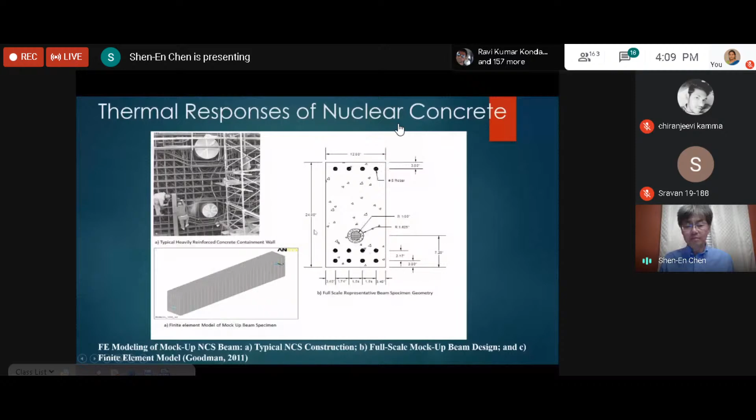To demonstrate the challenge in nuclear concrete material technology, we modeled a beam with heavy reinforcement and pre-stressed tendon. As high temperature propagates through the material, which is what we'd expect from nuclear concrete, we recognize that the temperature measured from the far end of the material is not significant. This is a case of undamaged concrete versus damaged concrete.

When heat propagates through this material, we see there is a challenge in being able to measure the temperature change using existing technology. There are many different non-destructive testing methods we could potentially try, but none of them will be able to see the change in the concrete material.

As seen here, those are existing NDE methods. They are very good for buildings and bridges, but are definitely not sufficient for foundation type or nuclear concrete structures.

So we asked ourselves a question in our lab: is there anything we could do to enhance the sensing of concrete material? We came up with this idea — well, we didn't originate it, but since the early 90s there have been a few groups investigating the possibility of developing self-sensing concrete material. So we looked at the possibilities of making concrete self-sensing.

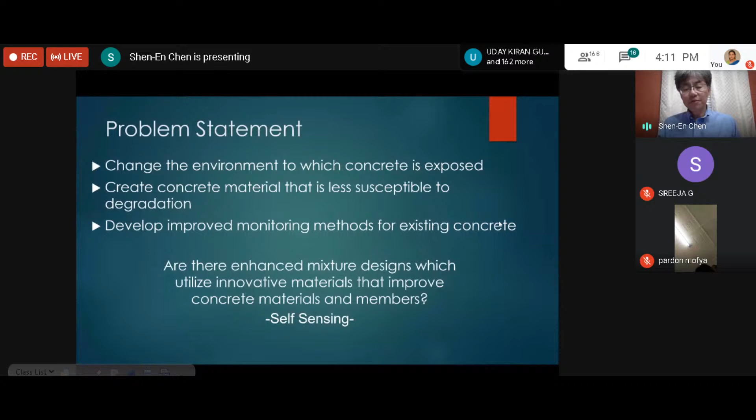One technique would be to use embedded or topical sensors, such as adding fiber optic sensors within the concrete material, or other embedded sensors like piezoresistive fibers and carbon nanotube coatings. But each of these techniques has its own challenges.

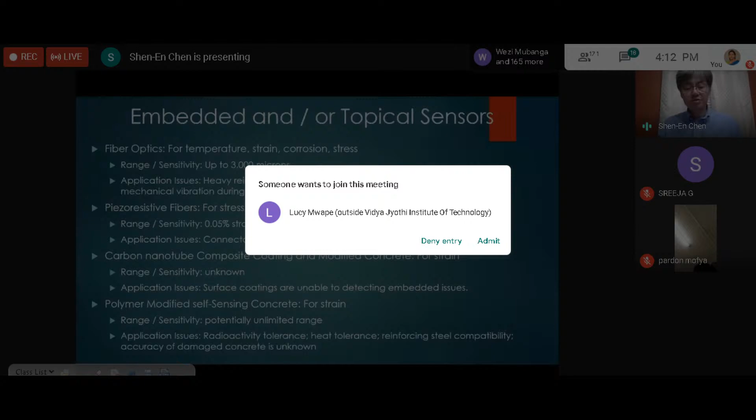The technique we came up with is to enhance the material property of concrete by adding conductive elements — there are many conductive elements we could add. Concrete itself has very poor conductivity. Typical reinforced concrete already has rebars, which have high conductivity, but as I'll point out through the presentation, there are actually many aspects to the electricity concept as we try to develop this technology.

The key is, if we can add certain conductive elements into concrete and make it more electrically conductive, we'll be able to make concrete self-sensing. By self-sensing, we mean adding an electric current to the conductive element, then by measuring the change in resistivity of the material, we can project the change in the condition of the structure. Some of our studies explore whether self-sensing concrete can feel stress or strain.

One of the challenges is to derive the correlation between electric properties and the physical stress strain properties of concrete. This is a very condensed version of our derivation. Ultimately, we wanted to be able to present the strain change in a concrete material as a function of the change in resistivity.

Here's another challenge: we don't really measure resistivity directly. Most of the time, we're measuring the change in voltage, because you have an input current, which is in voltage, and what we're really measuring is the change of the voltage of the material. Another misnomer in this technology is that it's hard to define resistivity for typical concrete structural elements because of the changing geometries. So most of the time, what we're really doing is measuring the change in voltage, which can be translated into resistance of electricity in the material.

Using Ohm's law, here's another important point: in the equation there's voltage, current, and resistivity. The relationship is that when you introduce a current into concrete, you not only change the voltage, but also change the current. So resistance is a function of both the amount of current you introduce into the concrete, as well as the pressure drop, because voltage is really the change in electric current pressure going down your conducting element. There are many things that would impact your concrete's resistivity.

One factor is the volumetric fraction of conductive elements added into the concrete. Another is the presence of ions, because regardless of the age of the concrete, there is always a little pore water within the material, which allows free ions to migrate. Those free ions can impact the electric current and the composition of the pore space. So pore space size and volume is another critical element, and finally, the aggregate location within the material itself is also critical.

From the measurement perspective, we could use direct current or AC, alternating current. The different techniques have significant implications for concrete elements, because a typical concrete element with its massive volume represents more like a capacitor. So if you use direct current projecting into the concrete material, the concrete would actually absorb that electricity. If you look online, there are people studying how to use concrete as an energy storage technique for electricity.

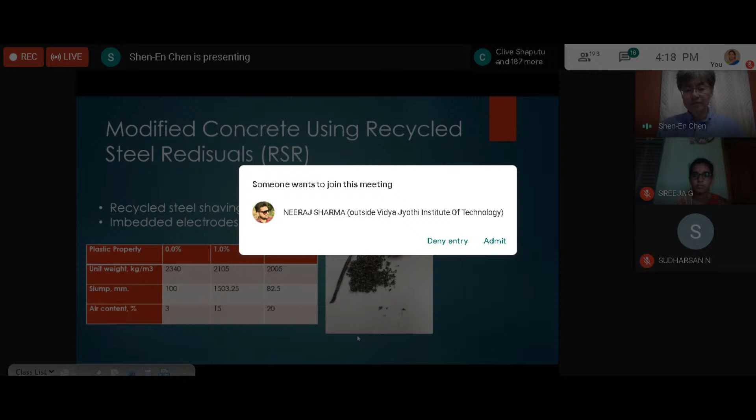The conductive material we choose is actually recycled steel residuals. I apologize for the misspelling there, but this residual material is a waste material from the steel forming process - the stuff that steel fabricators would normally send to steel mills to be remelted into new steel, or just dump in the landfill. So this material becomes extremely low cost and sustainable, because instead of leaving it in the elements, we reuse it, making it very valuable.

But processing this steel material requires both sieving, since it involves different shaving sizes, and dealing with a lot of dust. It needs to be cleaned because it may be greasy, and processed in order to use it back into concrete. In our laboratory, we try different proportions of this material added into concrete. I won't go too much into the proportioning, because the idea here is just to introduce the technology.

Another design consideration for this self-sensing concrete is how you embed the sensing element into the material. This is what we've built for the standard concrete specimen, where we put copper wires leaving about 25 millimeters of opening, so that when electric current is introduced through any of these conductors, the rest become sensing elements. In this case, we could introduce the current from the top wire or the bottom wire, and all the wires within would be the sensing elements.

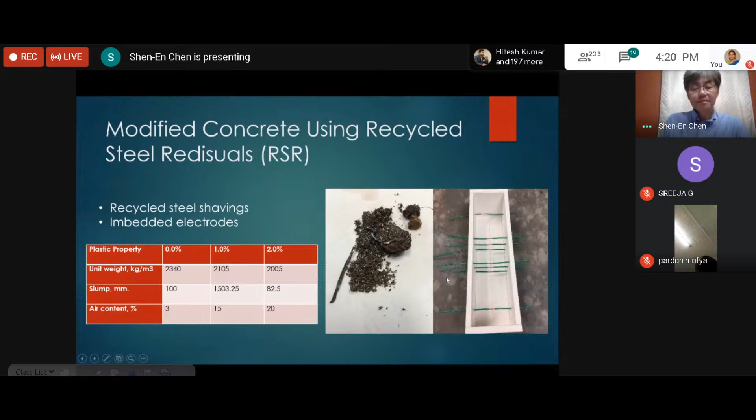Because of the steel fiber, your end product is actually stronger than typical concrete. But because of the added complexity, it's really hard to imagine the path of the electric current going through the material. So one of the challenges in this study is that we haven't been able to establish the theoretical model of what's happening within the system.

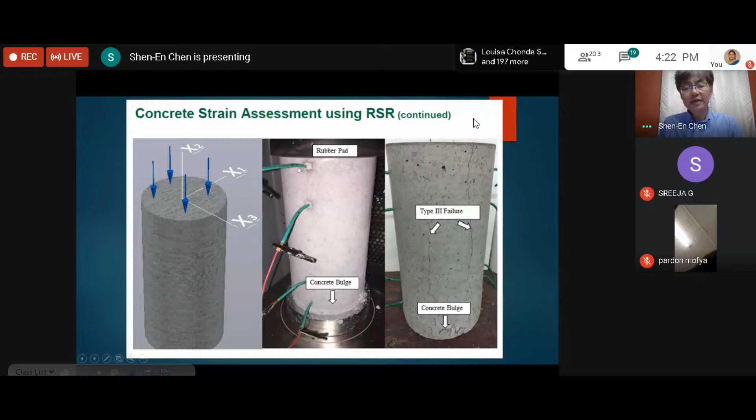So the correlations that we have developed are all based on experimental correlations. We first start testing on standard concrete cylinders. In order to measure the self-sensing component, we have to drill holes and then embed those copper wires to do the self-sensing, and then do the standard compression test on those specimens.

As you can see, the resistance change is actually consistent with the compression load, with some variation. And this variation is all material property dependent.

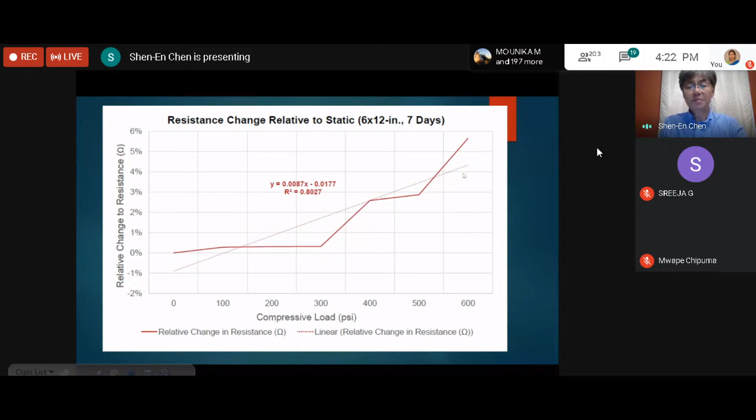This was the 7-day concrete. And then for the 28-day concrete, we were actually able to distinguish 3 different phases of the transition. And then we make a correlation.

So you can imagine during the small strain loading, because of the loading setting, you are expecting to have a larger deviation of your measurements. But then as you load to a higher strain rate, higher strain level, you will get a more consistent measurement. So this gives us a lot of confidence in the self-sensing capability of this concrete material.

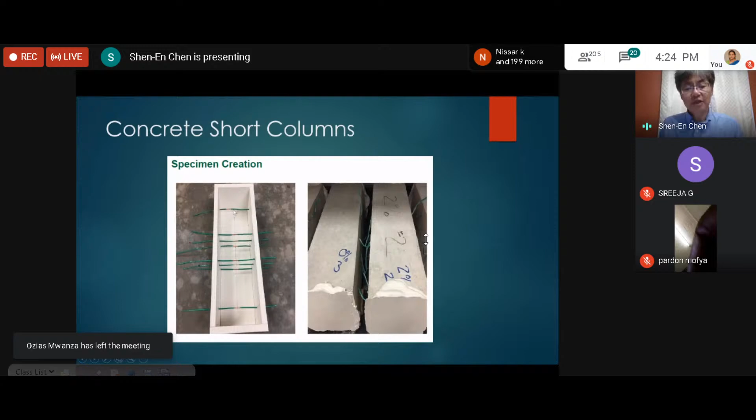And then we start developing concrete short columns. This is, again, the standard setup of using those conducting elements, the sensing wires. So the self-sensing component consists of 2 parts: one is the fibers that we add into the materials, and the second is the sensor itself, which are those copper wires built into the material.

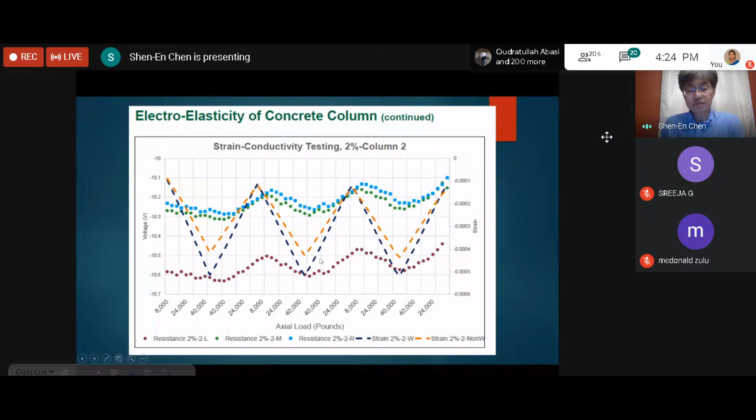And this is the outcomes from a 2% column. We do cyclic loading so that we can ensure that our readings are consistent and repeatable.

So you can see that we load this beam in a cyclic manner for 3 cycles - loading, unloading, and then loading, unloading again. And so for the 3 cycles, you can see the change in strain, which is read by the attached strain gauge, and then by the resistance or the voltage measurements.

And to make a practical application, you have to use the readings that you developed through the technology. And what you were able to accomplish is that you see there is an assumed linear correlation, so that by matching the linear correlation with the theoretical equation that we have derived.

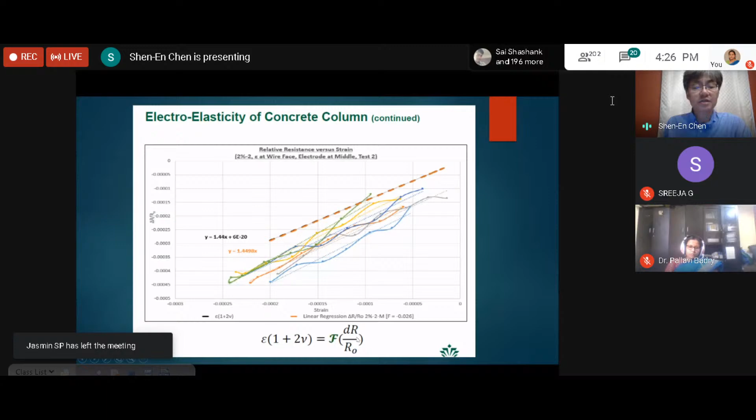So here there is an empirical factor F that you have to embed into the measurements, so that you're able to correlate the change in resistance to the change in strain.

And then at that juncture, we know that the self-sensing is a very useful technique, and we are actually developing good correlations between stress strain and also the voltage change in a self-sensing concrete. And then we have another student who got interested in studying the thermal cycles of the concrete material.

And so we do what we call the cool down test. We first take the specimen and then put it in the oven and heat it up to 100 degrees Celsius. And then we allow it to cool down.

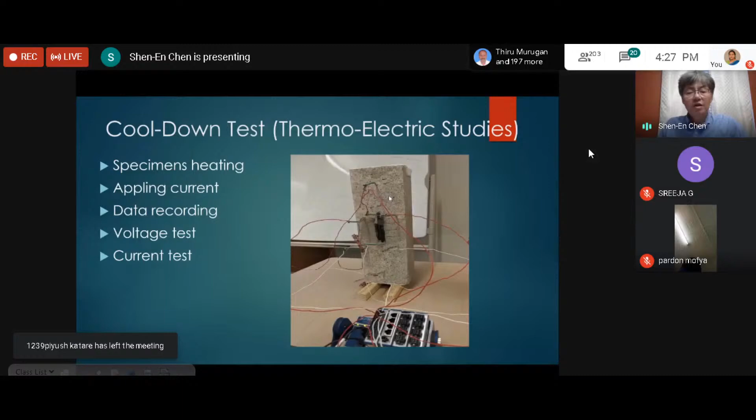We're trying to correlate the thermal properties, which is the temperature change versus the resistance change in the concrete material. Again, the same technique: we use applied currents through the material and measure the change in voltage. At this juncture, we also realize that there is another component to it, which is the current also changing through the material. So in this particular test, we did both the voltage and current measurement change.

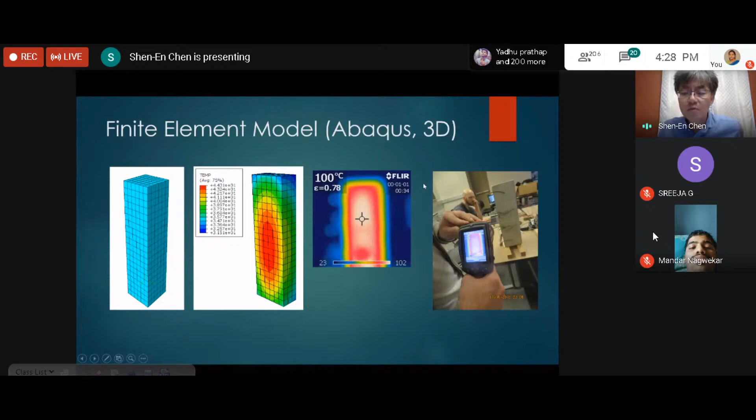The general idea is that the surface of the material is cooling at room temperature, so you have a hot core and a cooling surface surrounding the hot core material. This red spot here is where we have the strain gauge and epoxy, so that has a different cooling effect on the element. This helps us understand that what we're measuring is accurate.

So it becomes apparent to us that the technique needs to have both current and voltage measurements in order to accurately quantify the change in resistance. But that makes the technique a little too complicated. So again, we're trying to develop a correlation between temperature change and the voltage measurements, and we were able to use both Joule's law and the temperature change to develop a correlation between the two.

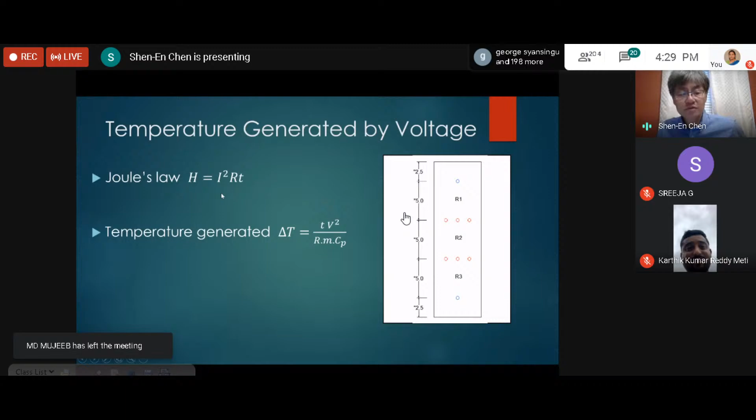One application of thermal concrete is the new idea of using concrete as an energy storage technique. There are two applications. One is to apply this as a fossil or any kind of mass energy production plant.

During fossil energy production, we use a lot of water because the water would be heated up to steam, and the steam pushes the turbine so that we can generate electricity. But usually at a fossil plant, we release the steam into the atmosphere. So with this concrete energy storage concept, you can actually circulate the steam through those concrete pipes.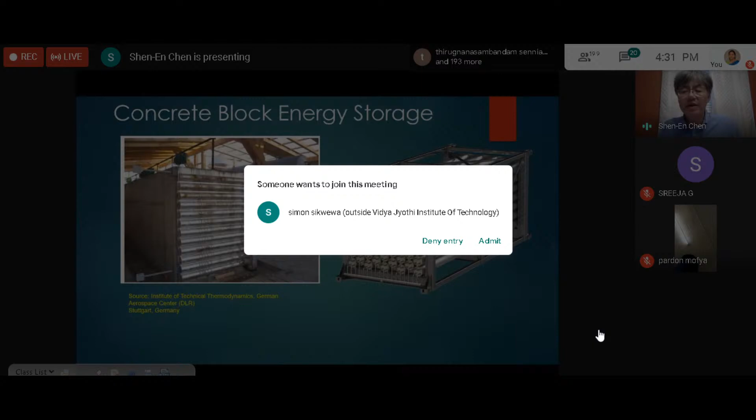In our laboratory, we're also trying to develop such a technology, but at the same time we try to introduce self-sensing into these elements. The reason we do that is, as you can imagine, going back to this slide, if any of these elements are fractured or damaged, because they are so massive, you will not be able to detect the change within the storage system. If we can make this element self-sensing, then we will be able to pinpoint which cylinder was damaged, and then we can replace that particular cylinder.

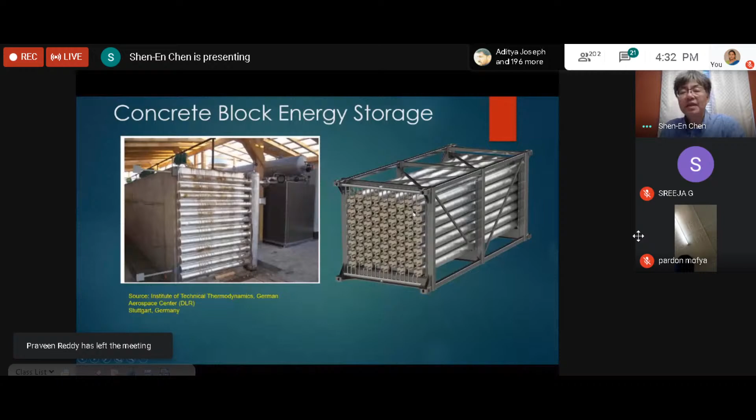So it becomes a very effective technique and reduces a lot of labor and cost for the concrete storage technique. So there is advantage to doing such a technology. To develop such an element, we use thermal quantification of how much energy is stored into those cylinders, and then we embed, using the fiber reinforced concrete, as well as embed electrodes into these elements.

Okay, so this is our energy storage concrete design. You have a heat drum where you circulate heated water through the system, and the water pipes introduce the hot water through those elements. We have two different versions: one with four pipe cylinders, and the other with a single pipe cylinder system.

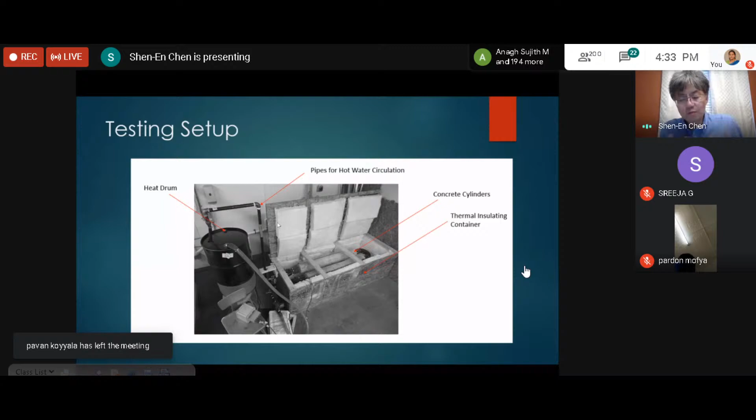This is ongoing research, so I wanted to point out some of the challenges we encountered doing this research.

This is our single pipe concrete element. You can see we have embedded a lot of thermocouples, which are not visible because they are K-type thermocouples. Those green wires are our copper wires for the voltage change measurements. The red coils are the thermocouple measurements. And this is the experimental setup.

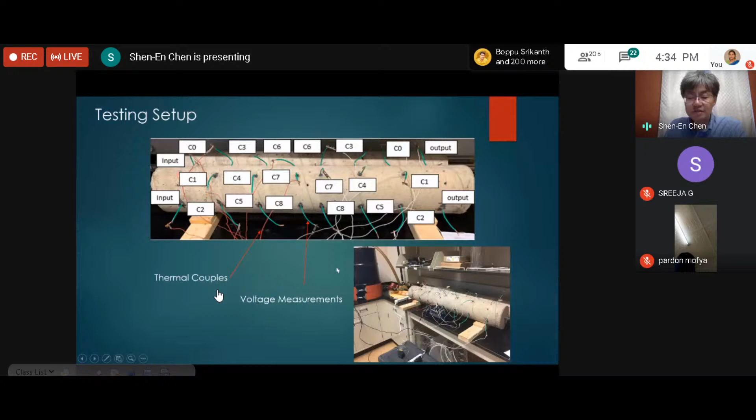We have the heat drum that heats up water that circulates through this pipe, and that would increase the temperature. We use finite element simulations to show, and also use infrared to show exactly what's happening with these concrete elements.

We were able to heat the elements up to 100 degrees Celsius, and during the heating and cooling process, we do the correlation between the voltage change. Here is the temperature change versus finite elements that we did on those concrete cylinders we made for the energy storage. These results are within room temperature, so there is no insulation element to this particular experiment.

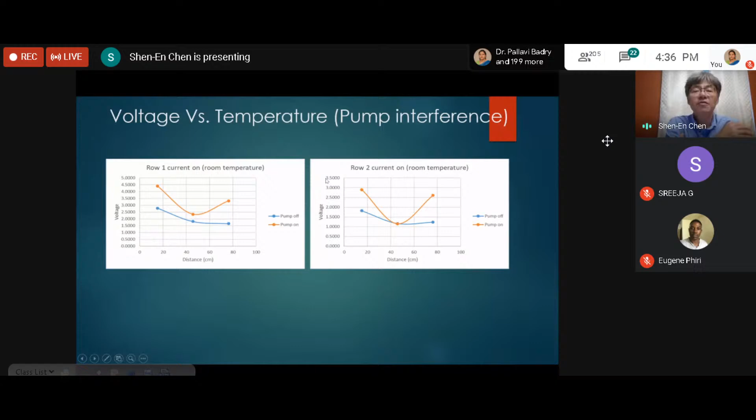Okay, and this is another thing we found. When the heat pump was on and off, the electric interference, the EMF interference, to our experiment is visible in our measurements. So that's one of the limitations of this technique - because you're measuring the voltage change, any large power systems surrounding your measurement technique need to be avoided, because they would interfere with your voltage measurement.

This can be avoided by shielding, but we currently are still learning how to shield those kinds of EMF effects. And this is the voltage change measured at different locations along the cylinder.

Another important thing to point out here is, as you can see, the results can have big variations. So the length of your measurement, the distance effect, is critical. We recognize that if you have a longer measurement range, you actually get better results, as shown here - 76.2 centimeters gives us the best correlation. Row 1, Row 2, Row 3 are just different positions along the cylinder.

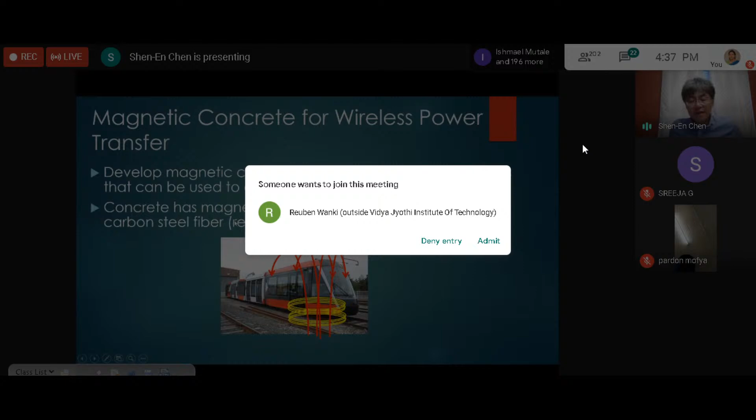Next, I wanted to discuss the magnetic concrete component. The inspiration for this is actually in wireless power transfer. In our laboratory, we also do a lot of railroad propulsion technology development, because our interest is still in the civil aspects of this. This is research work that we collaborate on with both the electrical and mechanical departments.

The challenge here is there is ongoing research on how to wirelessly charge electric vehicles. So instead of a train, imagine a car powered by lithium-ion batteries that need to be charged. Right now, with direct wired charging, there's a limit on how fast you can charge those cars. If we could have a lot of wireless pads underneath a car, you could potentially charge cars while the car is still moving. That is the inspiration behind this particular research.

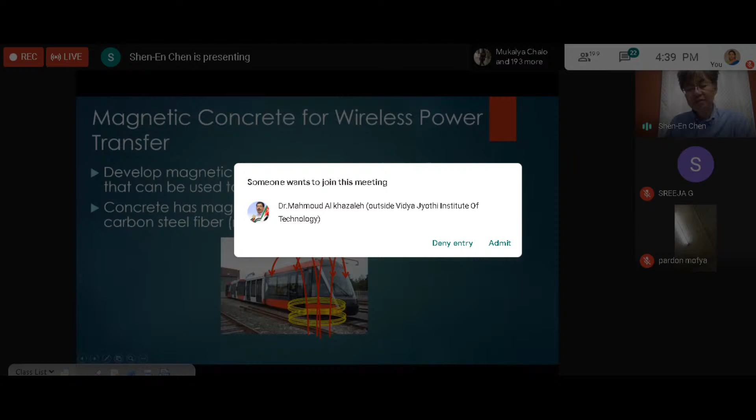So the question is, how do we design that? In our laboratory, because we focus on railroad technology, we wanted to develop similar charging technology for electric locomotives. Concrete has very poor magnetic permeability, so in order to make concrete materials magnetic, we have to modify the concrete material. Luckily, the carbon steel fibers we have used for our electric current research have a relatively high permeability, about 1,000. Not the highest materials, but again, there is a trade-off between cost and material property here.

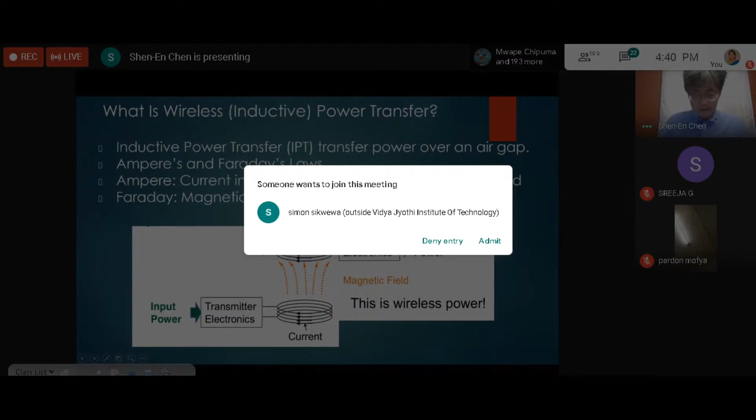Okay, so just to refresh your high school magnetism and introduce what is inductive power transfer. There are many methods to do wireless power transfer, but the most accepted technique, because we are interested in high speed and also high power transfer, is inductive power transfer.

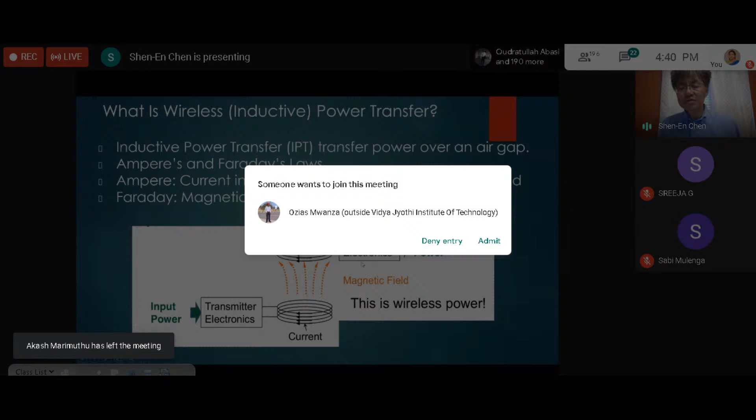Inductive power transfer requires two coil systems. One is the receiver coil that will generate electricity into your locomotive, and then the transmitter coil, which is where you use current to generate an electromagnetic field. This electromagnetic field results in an induced magnetic field on the receiver end, and then using power electronics you can convert that into electricity. So this is the general idea of wireless power transfer using induction.

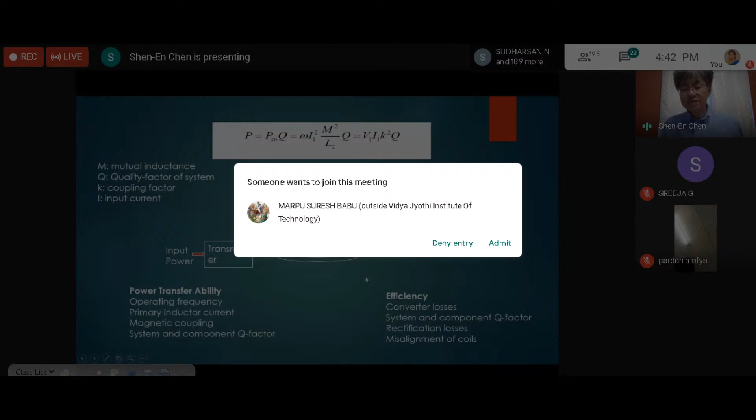This is a really neat idea because it combines both Ampere and Faraday's principles into the technology itself. A critical challenge in the design is that when you introduce current into your system, you need to make it into a single or multiple bandwidth magnetic field. In other words, we get into the argument of DC current or AC current, and in order to make this efficient, you have to take DC current and convert it into a single frequency or a bandwidth of frequencies to optimize the transfer of the magnetic field in your system.

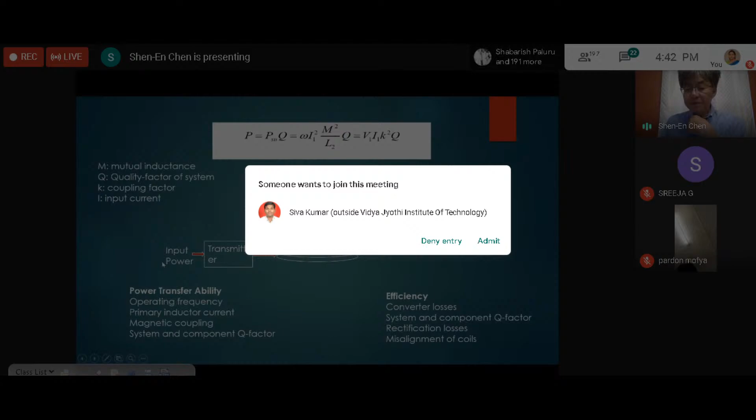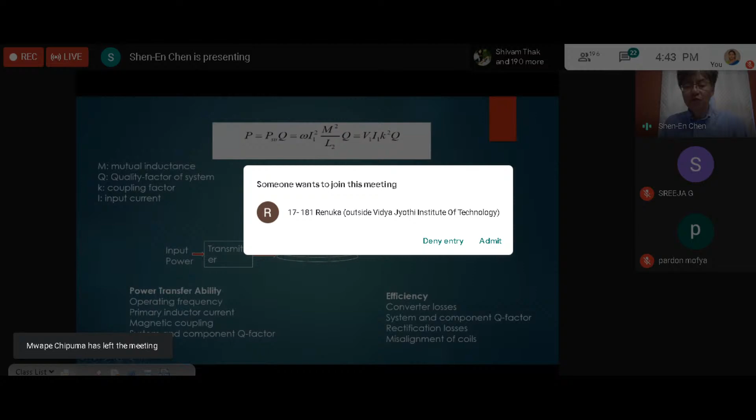There are a lot of theories out there that talk about the advantage of an optimal frequency, and one of the things you want to do is avoid the resonant frequency of the system. For any coil system, because of the size of the coil and the number of turns, you have an optimal frequency that is close to, but avoids, the resonant frequency of the system. So being able to select the design of your coils and determine the optimal frequency for the magnetic field power passing is a critical part of the research.

And here is where the practical application demonstrates. We imagine having a pickup coil, which is the receiver coil, embedded underneath the vehicle, and then the other wire coil will be embedded in the pavement.

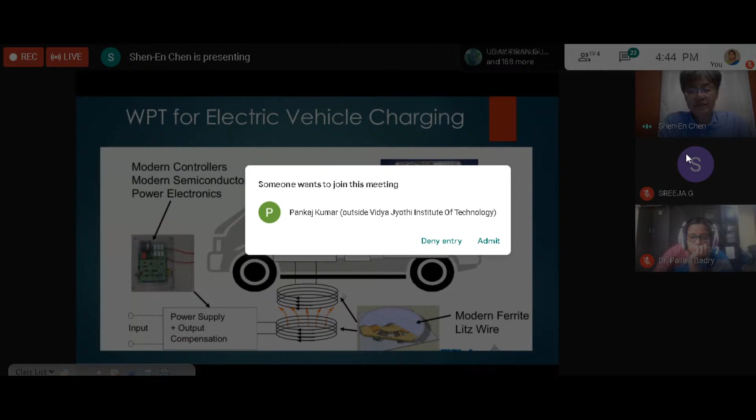So there is a receiver coil that is embedded into the pavement for the vehicle. A typical coil wire is what we use, the ferrite Litz wire. Ferrite is the most conductive element and practically cost effective. Ferrite has a magnetic permeability between 3,000 to 5,000 range.

This is not work done by ourselves, but just to demonstrate the application, this is by Nissan. This is a Nissan vehicle, and you can see the receiver coil and the transmitter coil are actually embedded within the concrete material. So what can we do to make concrete magnetically permeable becomes an interesting research topic, because then you can enhance the power transfer between the two materials.

You can see here this represents a single receiver coil and multiple on the ground. So when the vehicle is in motion, you can actually see that it continuously charges the batteries in the car.

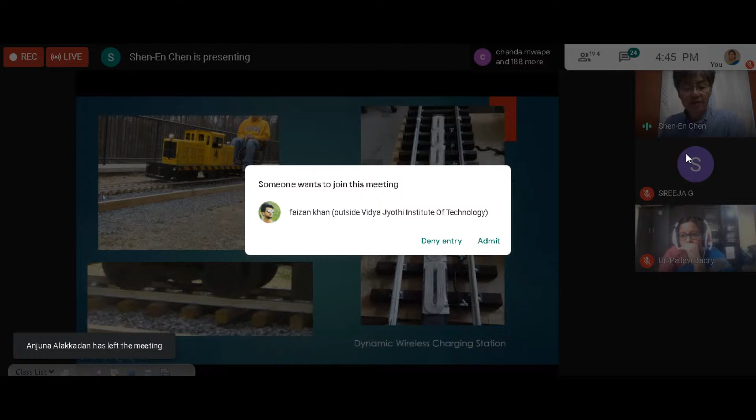In our laboratory, we have a homemade locomotive, a baby train if you will. It's actually a rideable train. You can see one of our students is driving this train, and we have a full track behind so that we can run the trains and do different developments to the system. This is our laboratory developed dynamic wireless charging system.

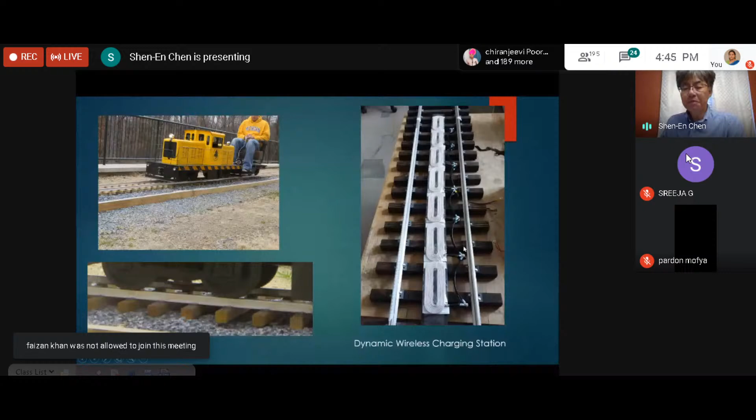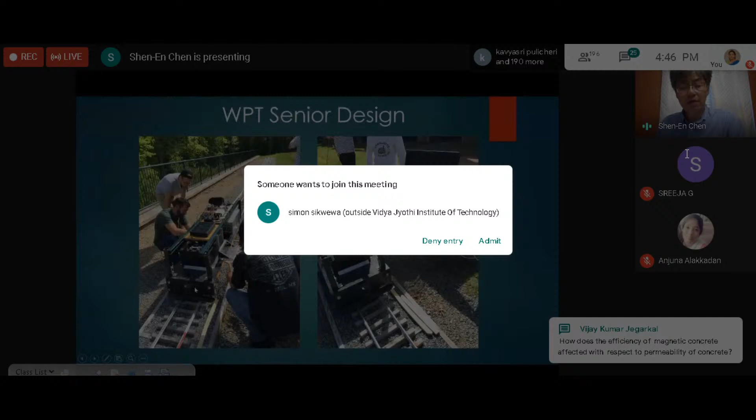So this is the part that I will describe. Our initial charging of the train has a wayside charging station. These two coils, one is the receiver end placed on the train, and then there is another coil that is the transmitter coil powered by the building electricity. This is all work done by our undergraduate students, the senior year students. They developed the entire locomotive, including modifying the power charging using car batteries, and the power electronics controls. The only thing that was not designed by ourselves is the motor of the train, or the engine.

For the wireless power charging, we have this Litz coil that was connected in series, because then they can be used for dynamic charging. This is the power supply system that converts DC current into AC current, which then goes through the Litz wire for the magnetic field generation. And this is the receiver end, which has a full bridge system, a half bridge system, that would actually convert the magnetic field into electric current.

This is what we call the air coil system. In other words, other than the Litz wire, we only use wood plates to form the coil system.

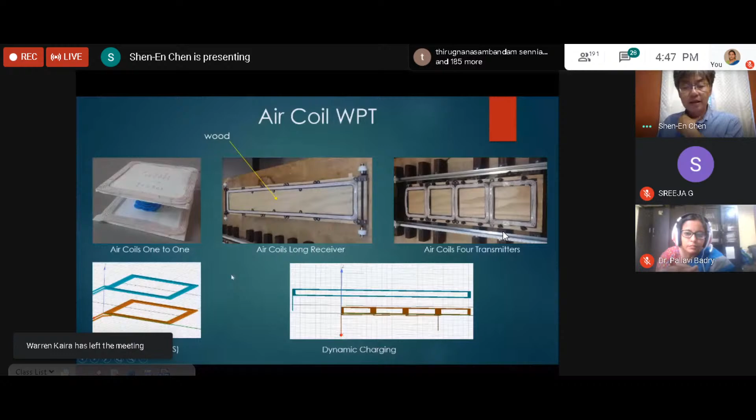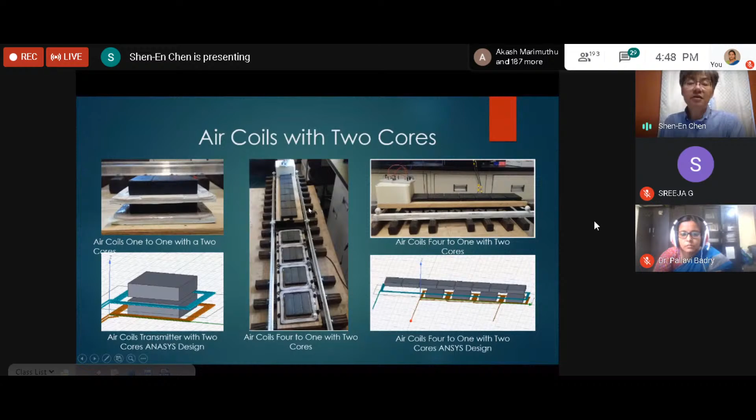One of the challenges of this design is that these ferrite materials are very expensive and very brittle, so they're not very reliable elements. So in our laboratory, we start to develop our own core elements using concrete.

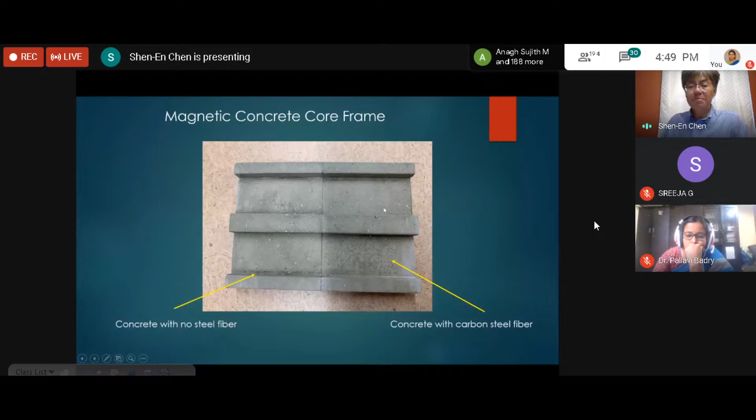This is the regular concrete with no steel fibers, and this is the carbon steel concrete with fibers. Concrete without fibers would behave just like wood or air, maybe slightly better because you do have some voids and moisture in it, but the one with steel fiber embedded would actually perform very, very well.

Now we can do a lot of things to improve the efficiency by increasing the wattage of the system, but because this system is so small, we limit ourselves to this. So this is the efficiency that we achieve.

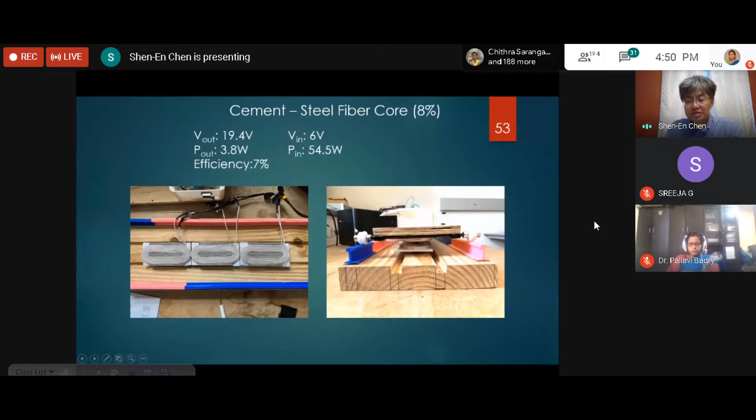When we use our steel fiber concrete at 8% fiber content by volume, we saw that we were able to achieve 7% efficiency. So it's slightly lower than the 9%, but it's still better than the air coil case.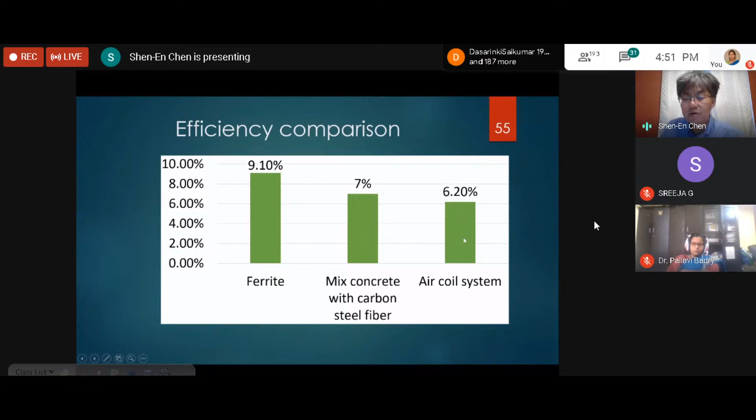And this is the air coil case with a larger air space, which shows only 6.2% efficiency. So here you see that with air coil you only have 6.2%, and with ferrite coil you have 9.1%. The mixed concrete with fibers, we actually reach 7% efficiency.

Again, it demonstrates that concrete with carbon steel fibers were able to achieve higher power transfer than the typical air coil system. That gives us a lot of confidence, and this is still ongoing research, so we continue to improve. I believe the last set of specimens we were able to make was at 2% steel fibers mixed into the concrete material.

In summary, we have demonstrated a new application of concrete technology that makes concrete itself into a self-sensing element, and also magnetic concrete for wireless power transfer. We are living in a very different world now, and the ability to modify building technology to make our world more sustainable is highly encouraged.

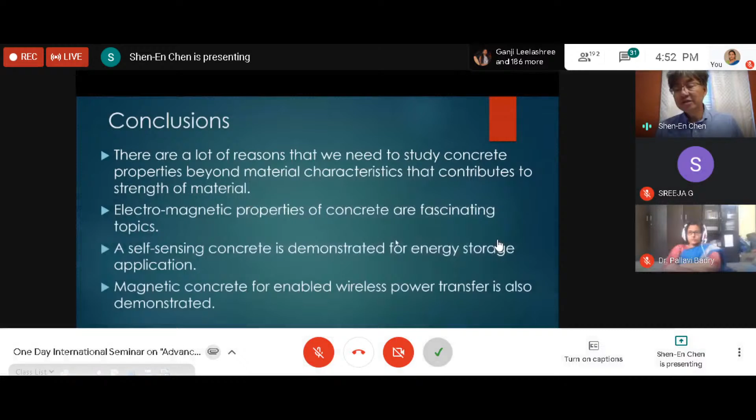But the challenge for us is really to understand something that we don't typically encounter, and that is the electromagnetic properties of concrete. So now we have to do more research to understand how concrete behaves, especially modified concrete for special intent such as self-sensing.

So how can we make concrete more electrically conductive and also magnetically attractive for wireless power transfer?

And then there is another component to this that we have not explored in our laboratory, which is what can we do to make concrete actually electric resistant, so that the idea is to make concrete an EMF shielding element. In this day and age, we heavily depend on electric products such as cell phones and such as the wireless communication that we're doing now.

Instead of us meeting face to face, we're actually dependent on wireless communication. And so all of those wireless electric devices generate strong EMF fields in our surrounding. So can we make our buildings selectively shield us from those EMF effects? This should be a very important research topic for the coming century.

I think that is the last - oh yeah, there is one by Colonel Sudhir, a very interesting question. He asked about self-healing concrete versus...

I'm not very familiar with self-healing concrete, but that is a very interesting component, because I believe self-healing concrete actually has two or three types of technology, one of which is self-healing through a heating process - you have to add energy in order to make the concrete material self-heal. And then there is another type of self-healing concrete. So, in other words, I'm not sure if there is a true self-healing concrete technology out there. But the general idea is when you have a crack, the self-healing elements will actually rebond the crack material.

Yes, we can use magnetic concrete in rigid pavements.

Sir, can I add a question? Yes, sir. Yes, ma'am. What is the most unfavorable high temperature range that can weaken the concrete or even damage the internal structure?

In our literature review, as demonstrated in our laboratory, we are not able to heat the concrete elements higher than 100 degrees Celsius because of the heating design we set up. But we know there are facilities that allow concrete to heat up to 700 degrees Celsius in the fossil power plant scenario. Regarding the grade of concrete, that's a good question. Usually they use high grade concrete for this purpose.

Thank you, sir. And what is the percent of recycled steel residuals in concrete? We have used, as I mentioned, up to 2%. There is a possibility of increasing the steel fiber content, but then at some point you're going to have problems with workability of the mixing of concrete, because the steel fiber tends to absorb water into the system.

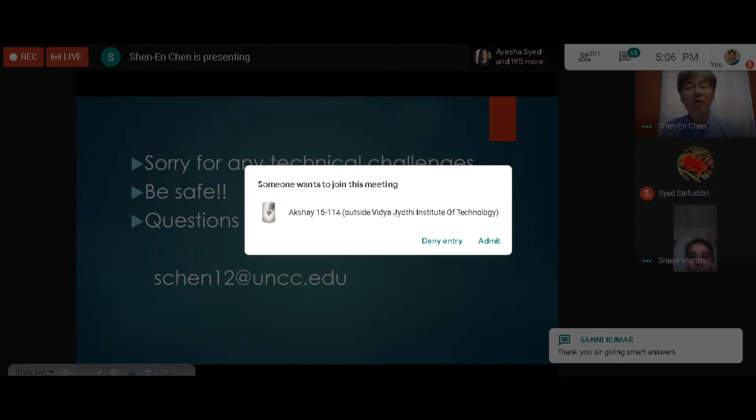Thank you, sir. And one more question for you: how much maximum heat is generated during this process in human tissues? Excellent question, because yes, in the process, one of the effects on efficiency is the high temperature. We don't have specific numbers, but we do know that the system would heat up. Yeah, good question.

Thank you, sir. And what about the corrosion resistance? If the steel fibers are properly treated, usually you will not have any corrosion issue. But because we are using carbon steel, it is possible to have corrosion. So you have to make the concrete water impermeable. I imagine rain can corrode those carbon steel fibers.

Thank you, sir. Why are you using carbon fiber? Any specific reason? Carbon steel, again, because it's the lowest cost element that we can identify. Also in the magnetic application, carbon steel has higher magnetic permeability than stainless steel.

I extend my warm thanks to today's chief guest, Dr. Chen, Professor of Civil and Environmental Engineering, University of North Carolina, US. With his busy schedule, he accepted our invitation. Thank you sir, your session was very informative with a nice presentation. We learned a lot of things today, like self-sensing concrete, pullout test, concrete electricity transfer, and magnetic concrete. It is very useful and helpful for our researchers, beginners, and those working in this area.